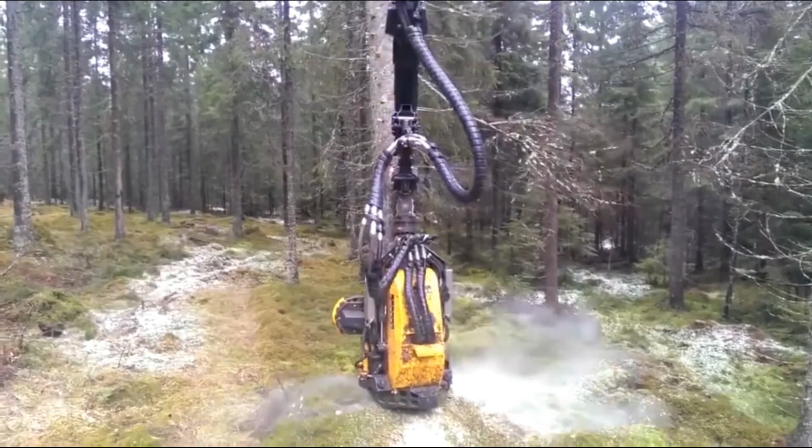This little device is affectionately known as the tree hugger. It's a marvel of engineering. In fact, it does in about 30 seconds what it used to take 50 men an hour to do. It's incredible. But imagine if we applied the same ingenuity to saving trees as we did to destroying them. Imagine if we applied the same ingenuity to healthy buildings as we did to toxic ones. In fact, this machine reminds me of one from our childhood. Do you remember this one? It's kind of eerie, actually, how close it is.

Okay, you get it. So the story I'm going to tell you today is about the XPRIZE and my recent work with them. The story is going to sound a little crazy, but I promise it's all true. It's really kind of a journey that I went on over the last year. Now, if you haven't heard of the XPRIZE Foundation, don't be surprised, a lot of people haven't, I've discovered, but you've heard of their work.

So they're a nonprofit, based in LA. Over 12 years ago, they launched an X Prize for space travel. The founder, Peter Diamandis, wanted to travel into space, but he wasn't an astronaut, and he realized nobody was working on this. So he launched a very simple prize: 10 million dollars to the first person that designs a spaceship that can carry three people 100 kilometers in the air, return them safely, and do it again two weeks later. Very simple, very clear, very elegant finish line.

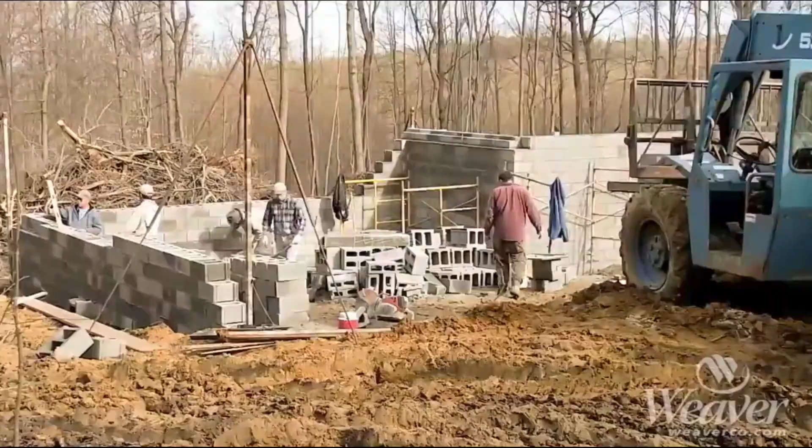The way we build our buildings is stupid. It's really dumb. It's a 200-year-old technology and involves a lot of resources and a lot of effort and a lot of labor. We mine natural resources out of the earth, and then we put them on fossil fuel-based ships and trucks, and then we schlep them all over the planet.

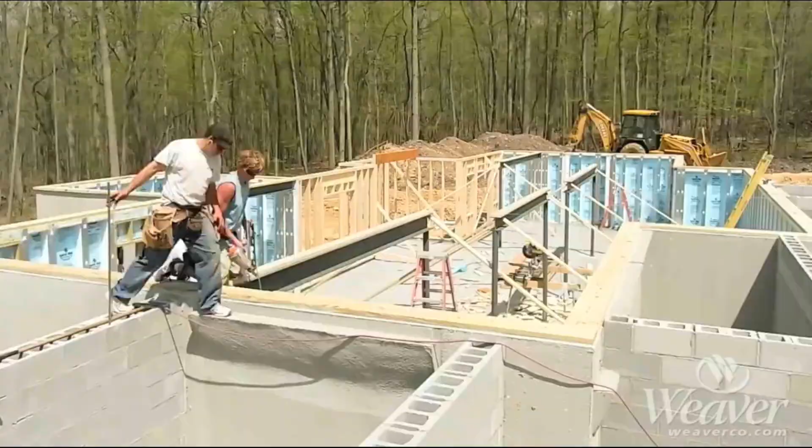And when they arrive on the site, they're not ready to go. They then need to be assembled piece by piece by piece. Every building is a bespoke prototype, essentially. Every building is a one-off. And we're not benefiting from the technologies of modular construction or GPS or CNC fabrication or robots or any of that stuff. We're still building the same way we built 200 years ago.

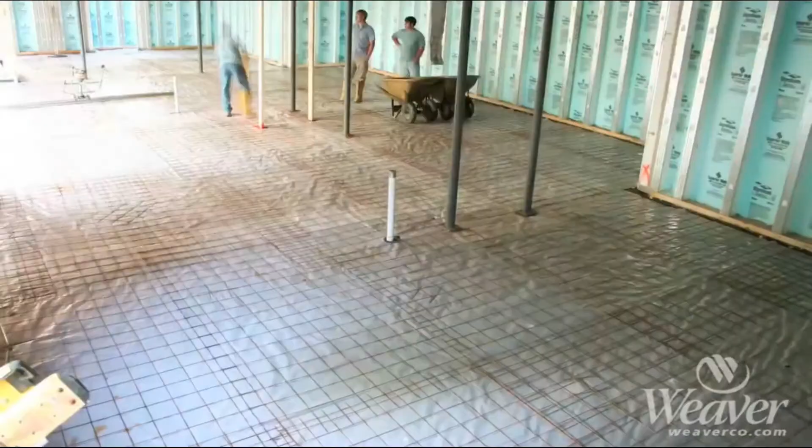And somewhere along the way, we managed to make the building somewhat waterproof, somewhat thermally efficient, but not really. They're not great. And that's the problem.

Within all of construction, there's this little tiny subset called green building. And honestly, that circle is way too big. I'm being too generous. Green building's nowhere near that big in relation to construction, but there's a potential exponential revolution that's about to occur, and it's going to pass us by if we don't tap into it.

A revolution involving biology, DNA, and health that could transform how we build our buildings and could transform radically the entire paradigm of how we construct anything. And so that's our big idea, essentially.

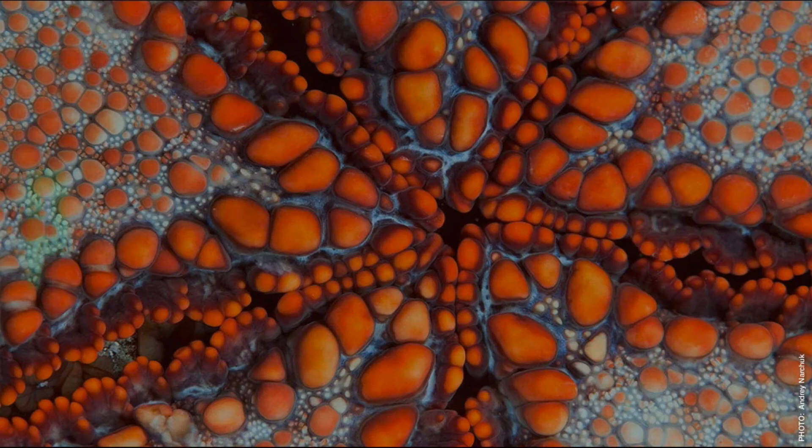And we call it, da-da-da-da, Wonder Woman, we call it prostruction. Prostruction is the opposite of construction. That's really it. It's designed to be positive. It's designed to be healthy. It's designed to essentially build the way nature builds.

So I'm going to show you our XPRIZE first, and then I'll explain how we got there. Generally, it's pretty simple. Grow us a wall, an 8-foot by 8-foot wall. Right? That's a good size. Have it match all the typical properties of a regular wall in terms of weight and strength and fire rating, but add in certain biological features. Maybe it glows, maybe it heals itself, maybe it absorbs CO2 or VOCs. Do this in 6 months and win $10 million. Again, very simple, very clear finish line.

Now, I should tell you a little bit about my background. I used to work for students of Frank Lloyd Wright. Mr. Wright called his architecture organic architecture. He even used biological terms to describe what he was looking at. He said that a building would grow from its site, that it would respond to its surroundings. And so for my entire life, my entire career, I've been waiting for this promise of true organic architecture.

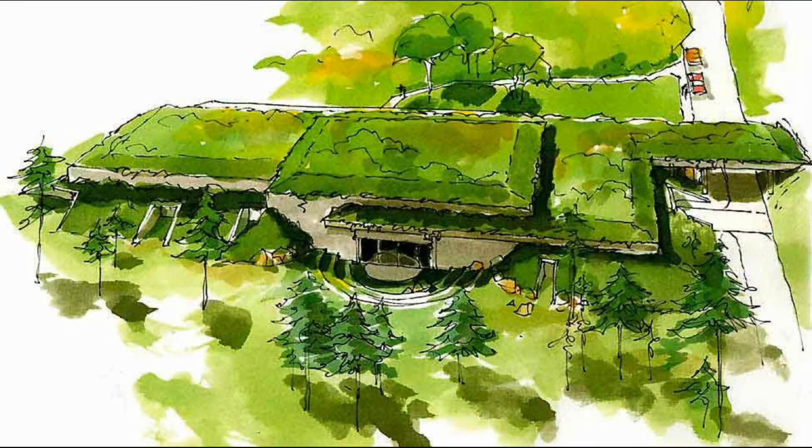One of my other mentors is Malcolm Wells. He was the father of underground building. Malcolm believed that we had a responsibility, a duty, that if we're going to build something, we're going to scrape the site to build a building, that we have to restore the nature that we've destroyed in the process. But most buildings don't do that.

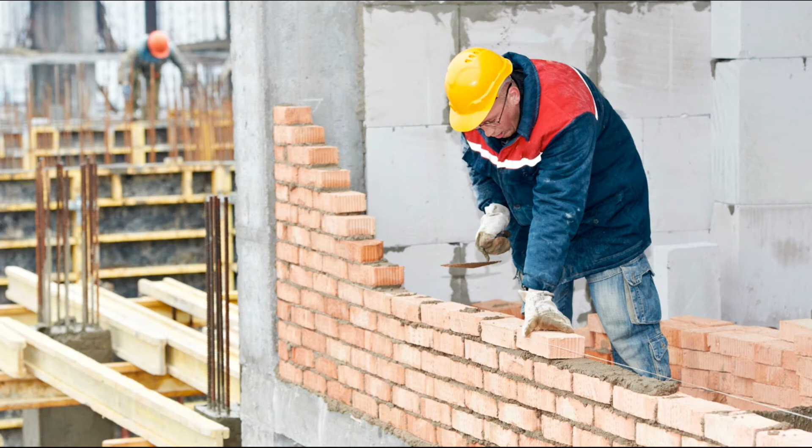Most buildings are put together essentially by hand, brick by brick. We've been building the same way for 200 years. And the way we build is just through brute force, just bam, bam, bam, right? We just hammer it all together and somehow it works. But these buildings are not very healthy and they're not very good outside, and they require a lot of maintenance and a lot of effort because we're essentially fighting entropy all the time.

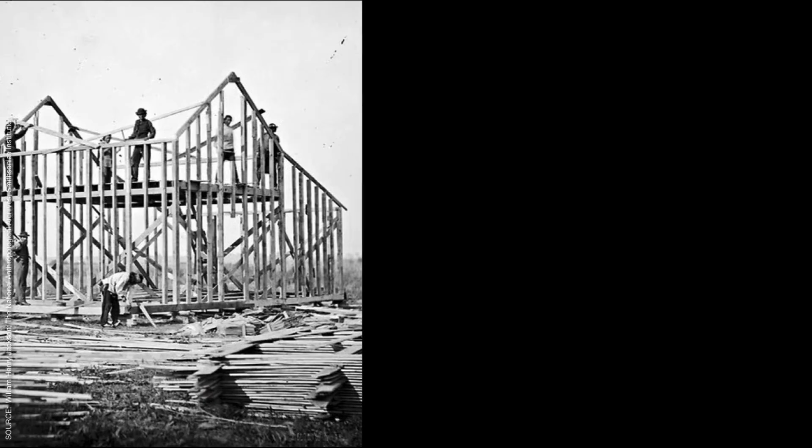In addition, we build the same way everywhere. We just crap out these buildings, and whether it's in Arizona or Alaska, it doesn't really matter. We build them the same way, and we've been doing this now for 2 centuries. And if you don't believe me, here, look. Here's a building from 100 years ago, and here's today.

They're exactly the same. It's the same technology. Really, I mean, the computers inside are nicer, but that doesn't affect the building. The base building is the same. I would show you one from 1817, but cameras hadn't been invented yet. Do you see how far behind this is? You could essentially resurrect a zombie from the Civil War, put him on a job site, and he'll go right to work. I mean, in a certain sense, that's convenient and helpful. But it really shows you how far we've strayed.

And we didn't know 200 years ago what we know today. We didn't know about indoor air quality. We didn't know about asthma, about cancer, about endocrine disruption, about any of those things that we now know. So none of that was really designed to address those issues. In fact, in most cases, it makes it worse. So it makes you think, as John Oliver would say, how is this still a thing? It doesn't make any sense.

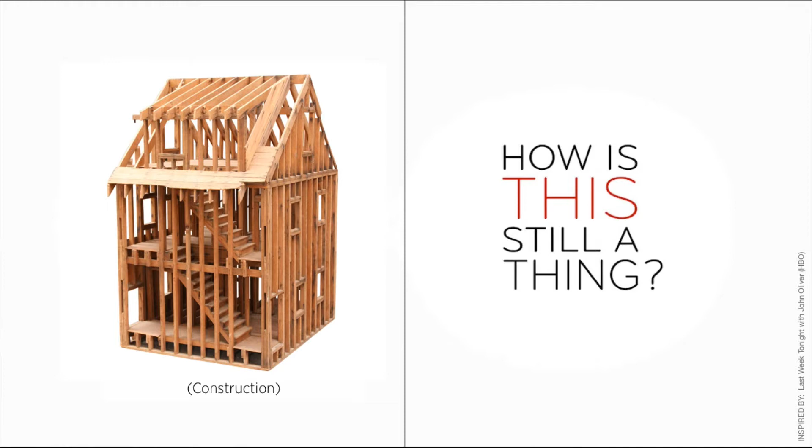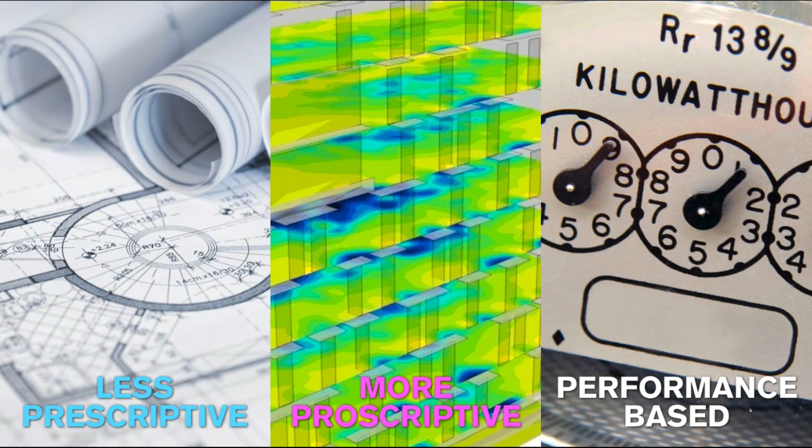We also know that building codes will continue to get less and less prescriptive, more and more proscriptive, and much more focused on performance-based. And that's already happening, right? In California, all new residential buildings have to be net zero by 2020. So this is just going to continue. And that's great, but I don't need to incentivize it.

It's already underway. All the while that this is going on, we also know that lobbyists are going to continue to drag their feet and block any meaningful regulation and stall things, especially things around climate change or healthy building regulation or chemicals. And we tend to only focus on finishes because they're there and they're out front and we can see them. And so there's lots of healthy finishes, lots of healthy furniture, but it doesn't change the underlying toxic problem that exists underneath.

Because imagine if the building was alive. Imagine what's possible. A building that breathes, that absorbs chemicals and CO2. A building that processes its own waste. A building that generates energy the same way that you do.

For years, I've thought about how would I mimic this in buildings? How would I do this in a mimicking type of way? And I did. I mean, I built thousands of buildings like this, buildings that I used to call healthy buildings. But this is not a healthy building. It's essentially my building won't kill you, right? So it's a benign building at best. Really, it's not. But knowing what I know now, I don't think I'd call it healthy. I avoided all known cancer causing chemicals, right? But still, it's not healthy.

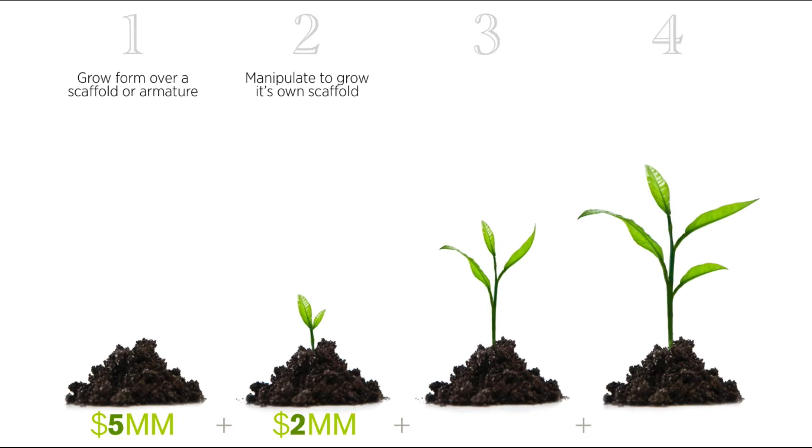We even mapped out the phases of how it could work. The first phase is if you were able to grow this wall over some sort of formwork, scaffold, or armature. Next, if it can grow its own scaffold at the same time—the same way your own body did, because you weren't born without a skeleton. Your skeleton and your muscles all formed together, so that'd be a next level up.

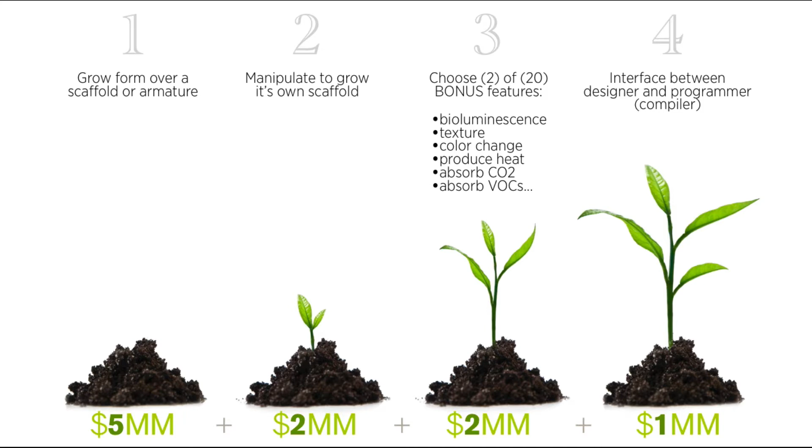And then if you can add in extra biological features, that's another level up. And then ultimately, if you create that interface between a DNA compiler and some sort of design program, then there's an extra bonus. We even defined the word grow—we had to. Essentially, untouched by human or mechanical hands or means.

And I know what you're thinking—you're probably thinking it's a plant-based thing, but it probably won't be. Nature has a wealth of technologies you could draw from, and plants, frankly, are too slow and not that strong. So we figure teams will do some sort of hybrid of two, three, or four of these different technologies. Maybe it's got a little plant in it, mixed with bacteria, mixed with some sort of crystalline or polymer-based thing, or some coral-based thing. Who knows? It's really up to the teams.

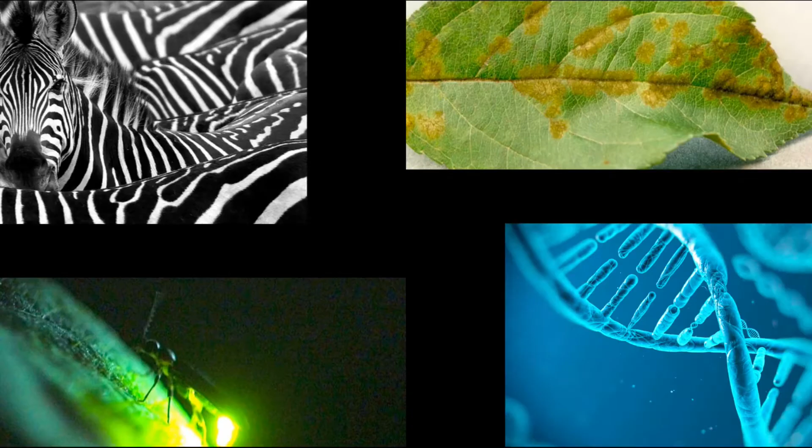Now, I know this sounds like science fiction, but it's actually possible—it's actually happening. For over 20 years now, there have been teams working on this, not for buildings, but generally manipulating biology to do what it wants. And in the last 3 years, this has become really prevalent, because for the first time ever, we know how a zebra gets its stripes, we know how plants heal, we know why a firefly glows. And it's all been possible through the cataloging of DNA.

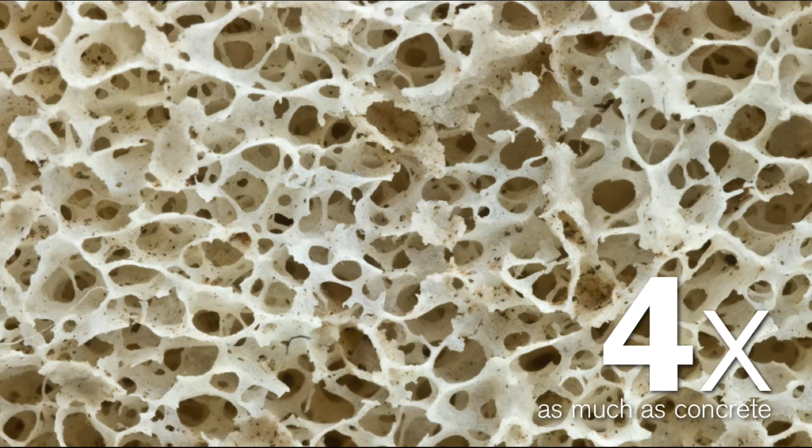Construction uses building blocks - we apply layers of structure, then skin, then fixtures, lighting, plumbing, and mechanical systems over time. In prostruction, everything grows together.

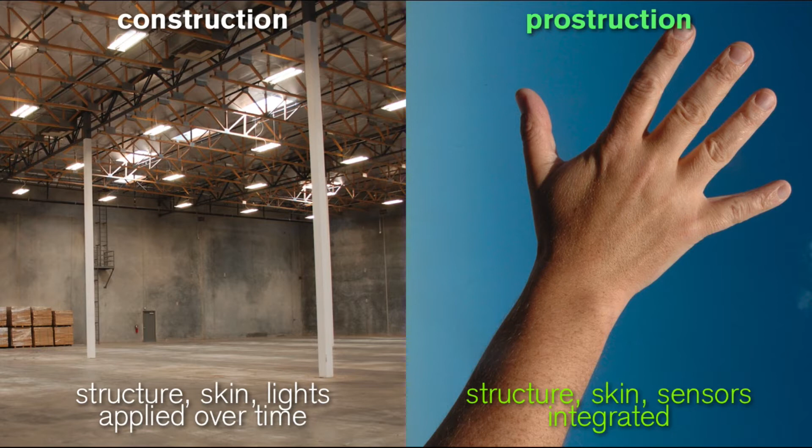You weren't born a skeleton, then had a building inspector check you out, then a team added muscles, then another inspector applied the skin. That's not how it works - it was all grown at the same time.

So we're switching from construction being mass production into prostruction's mass customization. Every building could be unique because it would respond and adapt to its surrounding and its site.

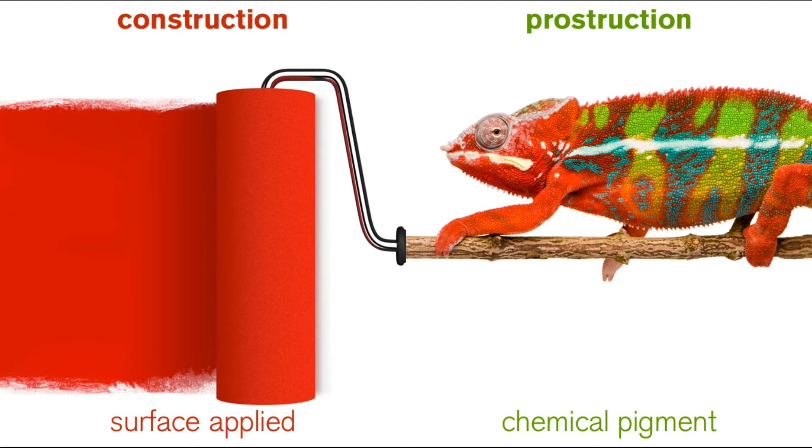We wouldn't need to paint anymore applied to the surface - pigment could come from within. And you wouldn't even need lights anymore, because the whole wall could glow if you wanted to.

Imagine every building could be a LEED Platinum building or a Living Building Challenge building. It'd be baked into the DNA of it.

Every surface could be a sensor or a smoke detector because it would just secrete the chemical when it came in contact with it. And the walls themselves could heal - you remove a picture hook and it heals up the same way your skin does.

You could even change the color based on your mood or the time of year. It's October, so for Halloween we'll make the walls orange, right?

You wouldn't even need street lights anymore because the trees could essentially light your way home. Every surface could absorb VOCs or CO2 or anything you want it to, really.

And this is very much designed to work with existing buildings. You would mix and match construction and prostruction all the time.

We even anticipate that people would talk about it - so you'd grow your shell with prostruction and then you'd still put in your IKEA cabinets or whatever furniture you want. You'd have to. I did a kitchen for a client once, and we spent $350,000 just on the kitchen.

It was gorgeous. Well, 10 years later, they ripped it out and did a new one. That's what people do. So let's grow our shell out of prostruction, and then you can build your regular things you're going to rip out with construction.

This very much could grow over the old buildings and restore them and expand them at the same time. So the old buildings could become like a formwork or a skeleton for the new stuff.

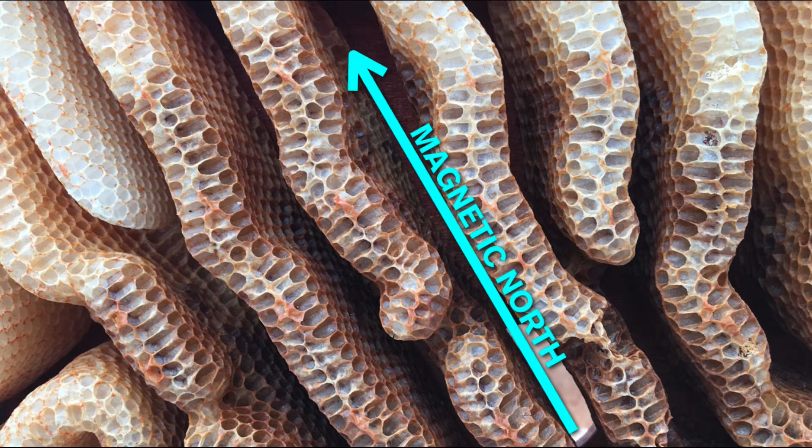We could even bake the building code itself into the DNA. So if you were to grow a stair, the steps would automatically be 7-inch risers. You wouldn't need building inspectors anymore.

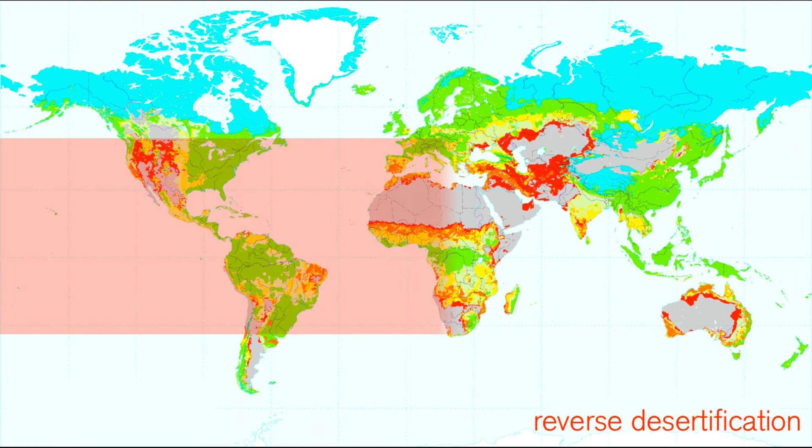And nobody's going to miss them, trust me. Any mistakes that you make don't become waste, they become compost to feed the next batch that you then grow. So this could very much reverse desertification in that narrow band on the planet where most of us live.

This thing is really designed to grow and evolve over time. Imagine every surface a battery, a sensor, a transmitter, an insulator. It's all possible.

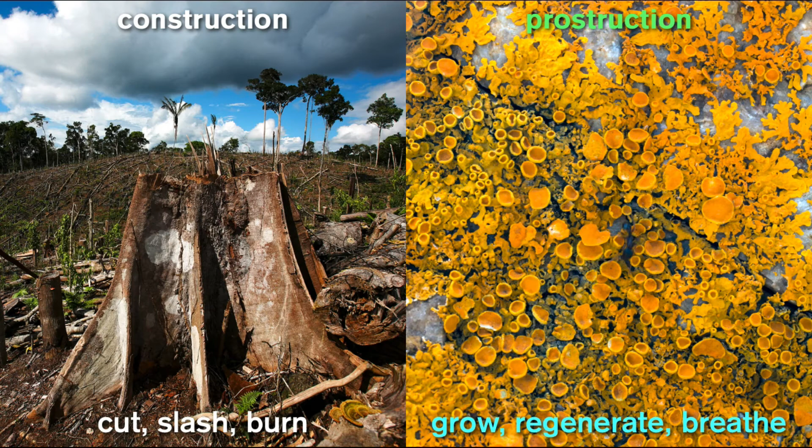So let's grow our buildings. Let's change this paradigm from one of cut, slash, and burn to grow, regenerate, and breathe.

This is not a new idea. This has been around for a long time, as I said. It's a field that's been not talking about construction, but talking about manipulating DNA to do our bidding. It's part of a larger set of trends that are exploding exponentially.

For years, we've had low emitting materials. That's already passe. Then we went into zero emitting materials - zero VOC paints, zero formaldehyde added plywood, and so forth. Now we're really seeing an explosion in agricultural waste-based products - straw board, wheat board, sorghum.

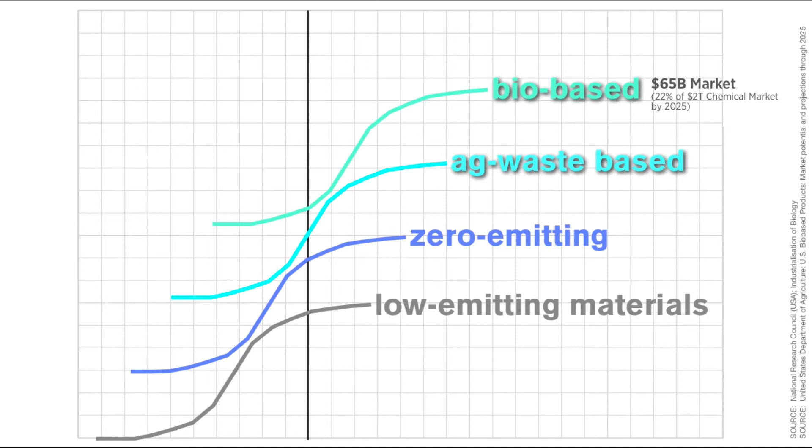DARPA, the research arm of the U.S. military, the guys that invented the internet, they have a biological technologies office already in place. Last year they put out an RFP for what they called engineered living materials. You can apply for it.

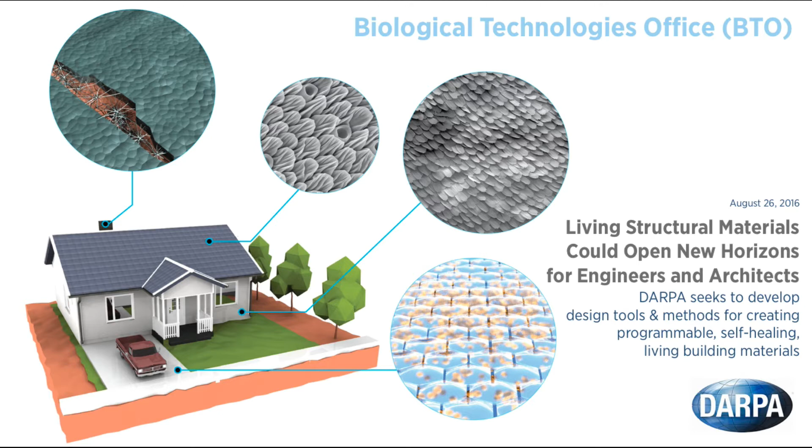So this is part of a larger movement, a larger trend that weaves together all of these disparate ideas that are working in silos and puts them into one big picture. It mixes cellular engineering and biology and DNA with everything we've learned about biomimicry, cradle to cradle, living buildings, and healthy materials.

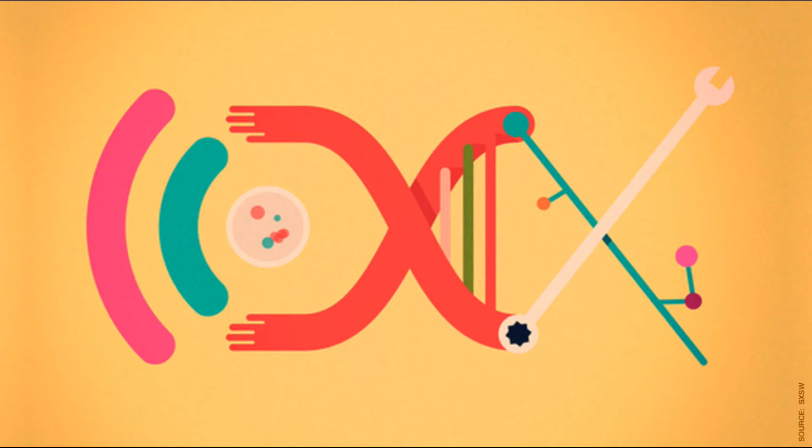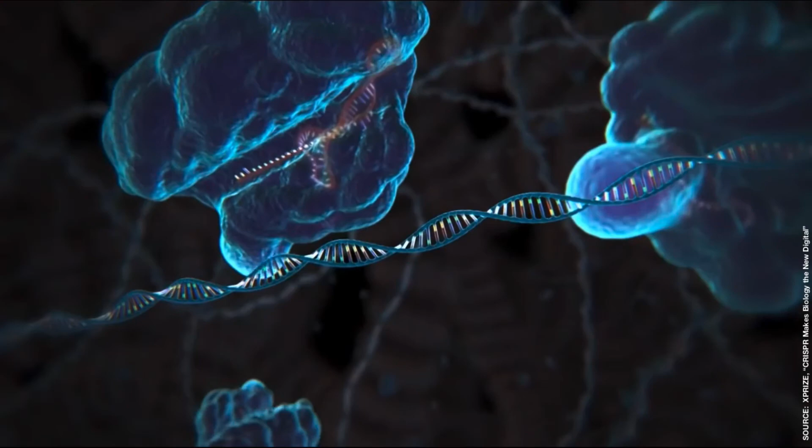For the first time in human history, human beings can now cheaply and easily catalog, edit, replace, and replicate DNA, and the cost of which just keeps going down. And it's all made possible by a technology called CRISPR. CRISPR is a molecular scalpel that we can program to cut any DNA sequence of interest.

CRISPR is one of the tools that is making biology become the new digital. Biology is the new digital. You hear that? So biologists are now able to mix and match and swap DNA code the same way that we swap MP3 files. And by the way, if you're wondering what CRISPR stands for, it's the world's worst acronym. Don't try to remember it, it'll just give you a headache.

But it's part of a larger field called synthetic biology. And every major university now has synthetic biology departments. So we looked up the hottest synthetic biologists in the world, and I contacted most of them. And these were three of my favorites, and they were really helpful with the project.

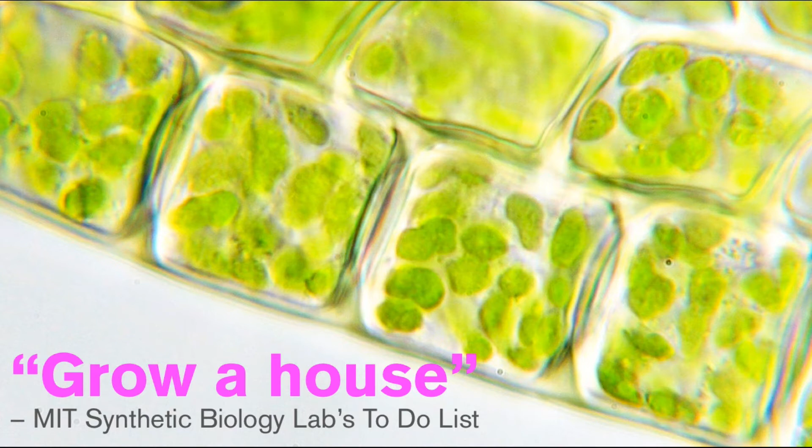Drew Endy from Stanford, and then Ron Weiss and Christopher Voigt both from MIT. And so I met with them all. And if you look at MIT's synthetic biology site, growing a house is on their to-do list. These three guys have been talking about this for about 20 years, but didn't really know how to do it.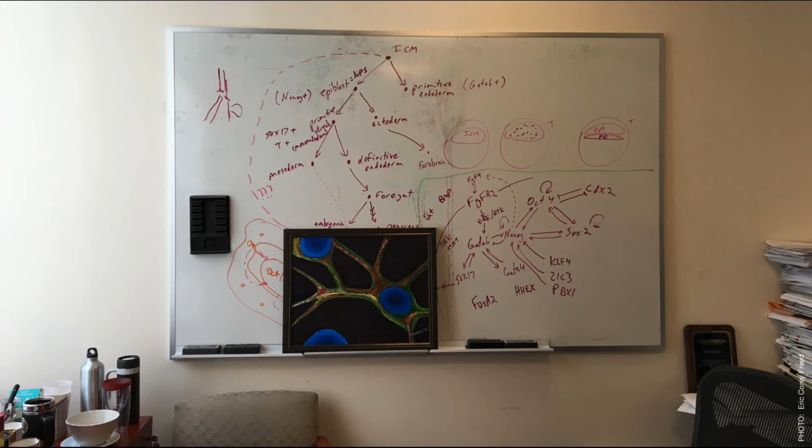That's his lunch order. Do you see what I'm saying? He's just a brilliant guy. He's at a whole other level than you and me. And we started talking about this idea of growing buildings.

And every time I said something to him, he would say, oh, that's easy. So what if I wanted a surface to be a smoke alarm? Easy. What if I wanted it to absorb VOCs or certain chemicals? Oh, yeah, easy. What if I wanted it to glow or heal? Easy. In fact, I started to get very uneasy about his use of the word easy, because it's not a very scientific word. And I said, well, what do you mean by easy?

And he said, we've already identified all the DNA that does those things in nature. So we could literally just drag and drop those as packages, just like we do with software. I said, okay, well, if all that's easy, what's hard? And he said, well, that's the problem.

Buildings are big. We can't grow anything that big. We don't know how to yet. And then he took out his phone, and he flips to a few pictures, and he says, see this? Yesterday I grew a liver. I said, what? He said, yeah, it was pretty cool.

I took some skin cells from the back of my hand. I programmed those to be stem cells, which is easy, by the way. And then we commanded those to become a liver. And I said, are you telling me you cloned your friggin' liver yesterday? Is that what you're saying?

And he's like, oh, no, no, no, no. This isn't a clone. This is actually a better liver. My liver sucks compared to this liver. This is a whole— I said, what is it? Play chess or something? What do you mean it's a better liver?

He said, well, this liver can tell us and alert us when it encounters disease, like cirrhosis. And I said, what does it send you, like a text message or something? Like, I'm an idiot, what do I know? And he said, no, no, when it encounters some sort of disease, it releases a chemical and changes color, so it alerts us. And I said, well, what do you need me for then?

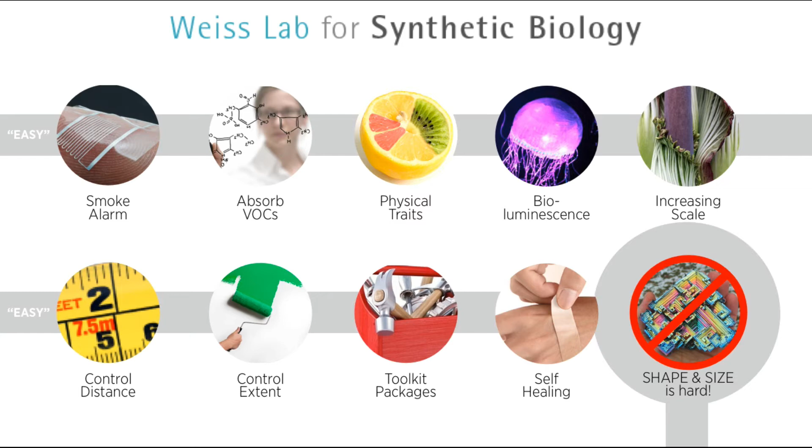An apple, for instance, is mostly scaffold made of fiber with apple DNA in it. You are a scaffold, right? You're a skeleton draped in muscles and tissues and organs.

And this is the problem. The scaffolds that the biologists use now are small. They're medical grade, they're sterile, they're expensive. What this XPRIZE really is, is a prize about growing a cheap, deployable, large scaffold so we can grow things bigger and more quickly.

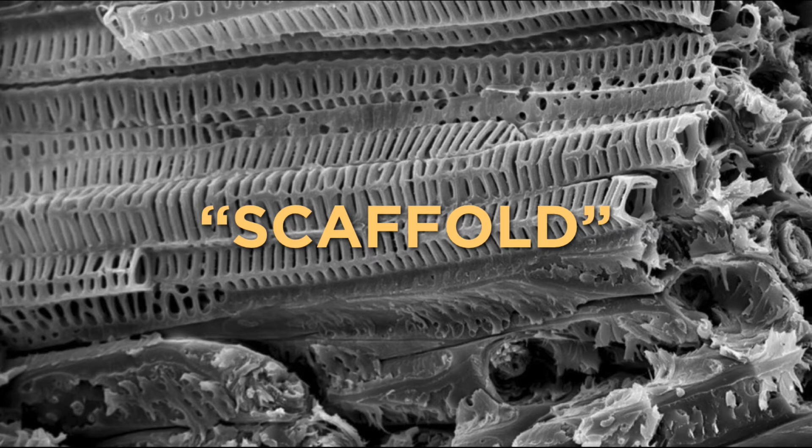Now, when I think of scaffold, I think of this, probably the same way you do - a kind of rigid frame that something grows on. Well, that's basically it, and nature has thousands of variations on how it builds a scaffold. So that's what this XPRIZE really is.

Build us a cheap, deployable scaffold. And in buildings, it doesn't need to be medical grade, it doesn't need to be sterile. It could be old apple cores if that really works, as long as it gets the job done.

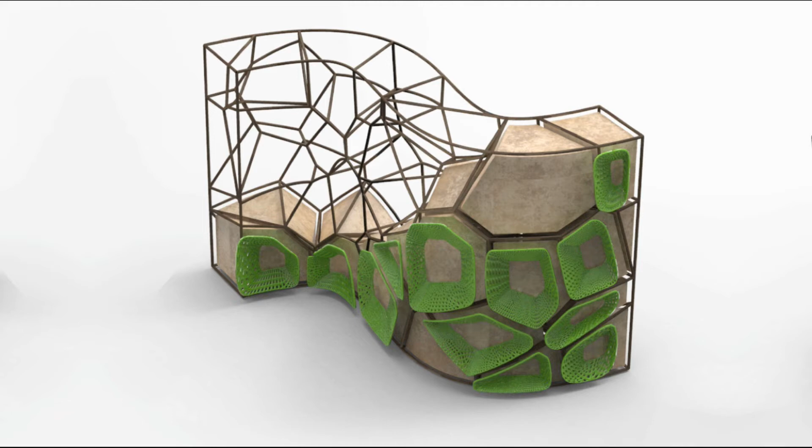So as I was talking to Professor Weiss, I said, how do we make sure that we don't get another, I don't know, Jurassic Park? How do we prevent that from happening? And he just laughed and said, well, first of all, your building's not going to try to eat you, and it's certainly not going to chase you around a kitchen. And if it did try to eat you, it would do it really, really slowly. I said, is that biology humor? And he said, yeah. So there you go. So if you're sitting there worrying that we're going to invent the next Swamp Thing or whatever, apparently it's not going to happen. It's not a problem.

Now the construction industry is desperate for disruption because it's not very sustainable. We have beautiful old buildings that we destroy and replace with buildings that are not as nice. So this is our chance to fix some of those economic failures of the past, update them and restore them. It's our chance to look at old infrastructure that's horribly inefficient, question it, and find a new way to do it.

It's our chance to look at models like this where we've paved over paradise and put up parking lots, and restore this back to something more useful - something that produces oxygen or energy or something else. Besides, what are we holding on to here? We're not very good at this whole building thing.

I know architects get romanticized, but the truth is we're not very well liked. In fact, they even made a commercial about it.

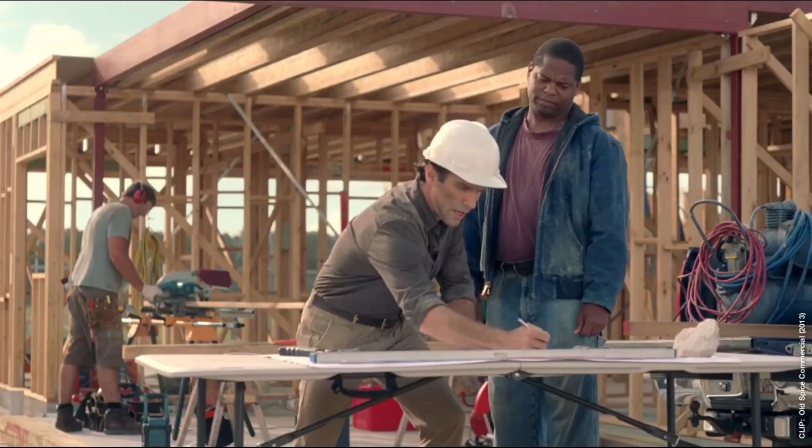You're working hard, you know that it's true. You need a brand new soap that works hard too. You are the worst architect in the world.

The title at the end is my favorite part.

Now, if you don't believe that we're not very well liked, just Google it. These are not fake, you'll see what I mean. Nobody likes architects and contractors. Everybody I meet all over the country has horror stories about their architect or their contractor - how they felt they got screwed or ripped off or not listened to. So we're not very popular. What are we holding on to here?

By the way, you can learn a lot from Googling things. Like, I didn't know that you could accidentally, quote, 'kill your sister.' I didn't know that was a thing.

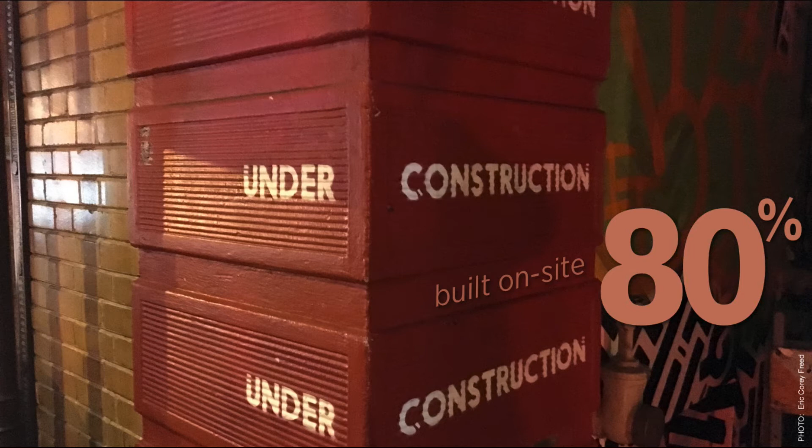Anyway, so our buildings are surrounded by failures. Every aspect of them is a failure. First of all, we build most of it on site, outside. It's very hard to build things outside. Do you realize that? Go buy a model airplane and build it outside, and you'll see what I mean.

We build it outside in the rain. And by the way, job sites are incredibly dangerous - one of the most dangerous professions there is. I was on a job site once and I stepped on a nail, and it not only went through my shoe into my foot, but then popped out the top on the other side. And that'll ruin your day, let me tell you.

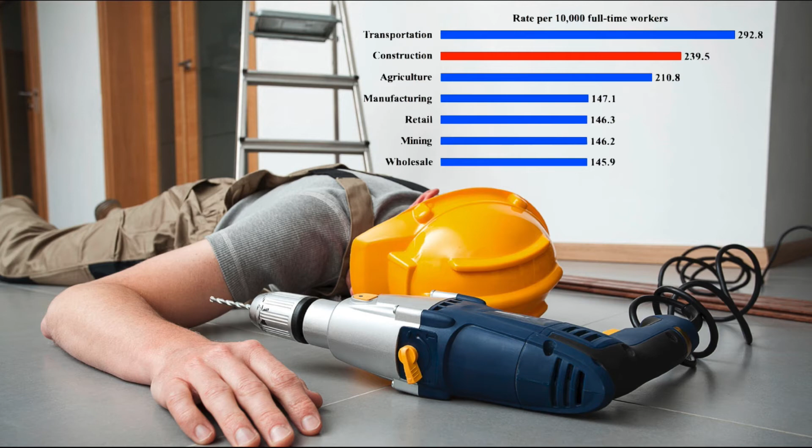And then buildings are routinely over budget and over schedule. It's become commonplace, really. In fact, we have whole meetings just to make sure how bad is it going to be.

Worker productivity has gone up in every other industry, but it's gone down in construction because we're building the same way we built 200 years ago. There's no technology here that's helping us along. So productivity is going down, labor costs keep going up, and our profit margins keep shrinking.

It's a terrible business model that keeps getting worse. Because of that, we have no time to research sustainability or green building methods. We kind of fit it in when we can, usually in our free time or evenings. All of these materials are mostly made elsewhere, far away, without any standard about health or anything else. Their costs keep climbing, and now they're externalized, so they're out of our control. We don't really have any say in it.

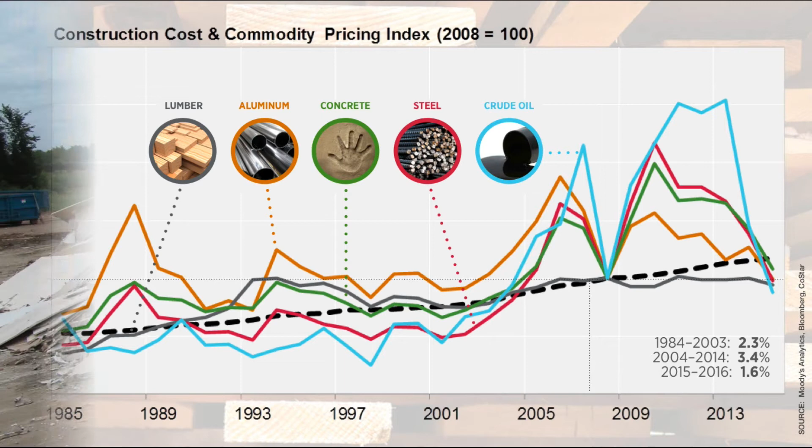On top of that, we're the only industry with a 37% waste factor. For every building we build, we have about a third of a building left over that we put in a landfill. That's not sustainable. Could you imagine if every time Apple made an iPhone, there was a third of an iPhone they threw away? They wouldn't be in business very long.

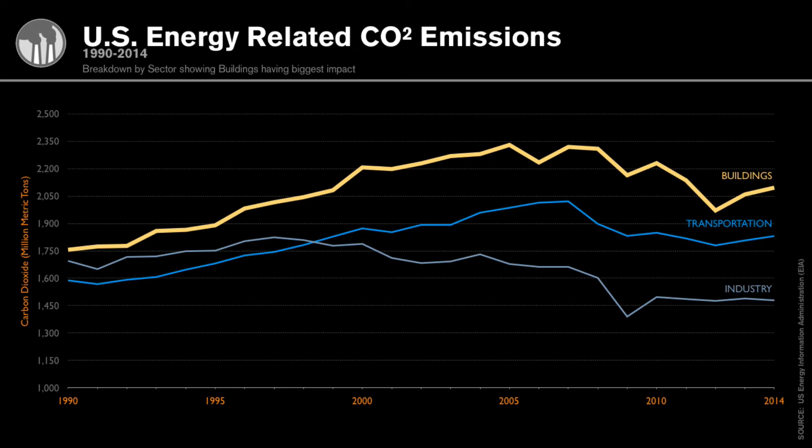And yet buildings are what need to change, because half of our carbon emissions are coming from our buildings. So pick your market failure, whether it's labor, waste, climate, or materials. We're surrounded by these failures. On top of that, our buildings are not very comfortable.

We're built in these beautiful, sensual curves. Some of you more than others, but still, we're built in these gorgeous curves. And buildings are not. They're flat and angular and bumpy, and you hit your elbow on them all the time, and they hurt. So we need to change this.

On top of that, they're killing us. What I'm talking about here is indoor air quality. And when you think of indoor air quality, you might be thinking of Dwayne in the cubicle next to you sneezing all the time. I'm not talking about him.

What I'm talking about is when a baby crawls across a carpet, it's absorbing known phthalates, known endocrine disruptors, through its little pudgy hands and pudgy legs. I'm talking about that new car smell every time we paint a room, more cancer-causing chemicals. I'm talking about the fact that indoor air is 10 times more polluted than the outside air, which isn't very good either, by the way.

Or the fact that all of you have on average about 17,000 known catalogable cancer-causing chemicals in your home right now. That's the trouble. And if you look at the sources for poor indoor air quality, 9 out of 11 of them come from buildings.

Because you can choose not to smoke and you can choose not to have a cat. And by the way, you should totally choose not to have a cat. They're weird, they stare at you, they're finicky. Don't have a cat is really my point here I'm trying to make.

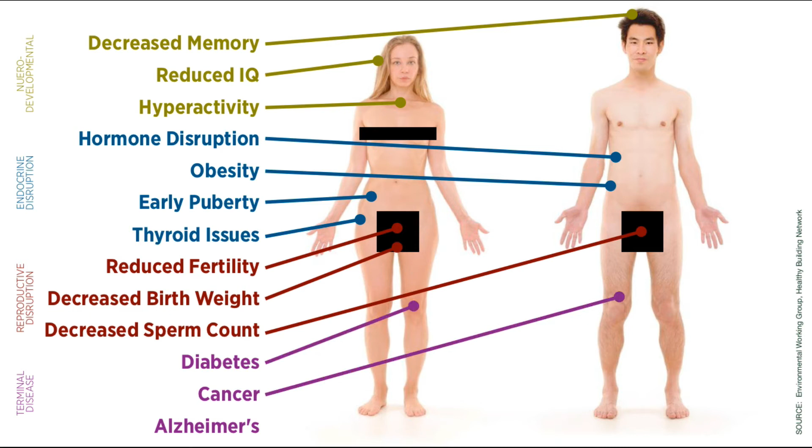So we can control most of these with buildings. We need healthy buildings now more than ever, especially now that over the last 30 years, we've realized how they're linked to a range of diseases—everything from neurological to terminal, everything from headaches to cancer, essentially.

And these toxins keep building up through what's called bioaccumulation. As we're having children, we're passing on our toxins to them. The average breast milk contains 500 known catalogable cancer-causing chemicals in it. The average umbilical cord blood has 300. And we still don't know how all of these different chemicals will interact with each other.

But buildings do not prepare us for this. Now, when you go to a restaurant, there's a social contract, right? You can essentially be assured that the waiter's hands are clean, that the dishes are clean, the silverware is clean, that the food, everything on the plate, is edible, including the garnish. But there is no contract like that with buildings.

So I would argue that also environmentalism has failed. 40 years of modern environmentalism has brought us to the exact place we were trying to avoid in the first place. Now, I'm an environmentalist, and I have friends that are environmentalists, and I'd be the first to tell you, we're annoying.

But what's going to change this? There's virtually no research and development in the building industry, right? Less than 1%. Compare that with the type of R&D they do in the aerospace or automotive industries, and you'll see what I'm talking about.

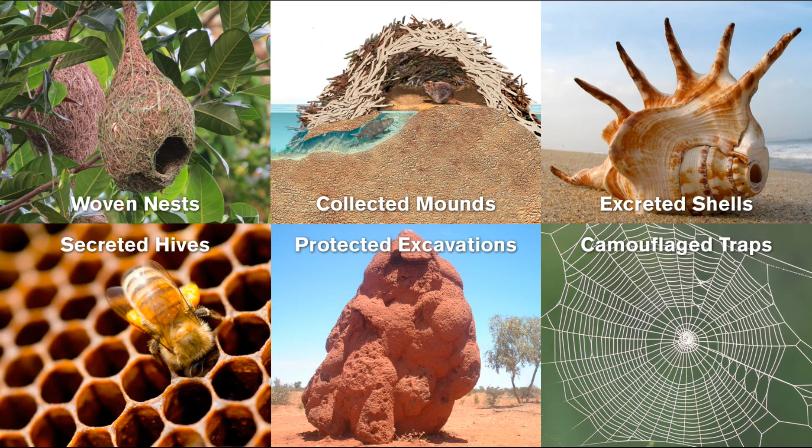This is the paper wasp. It builds its nest in a matter of days. It takes wood pulp from local trees, mixes it with saliva, and makes a form of cement. It can even change the hydrology of the cement based on the humidity in the air.

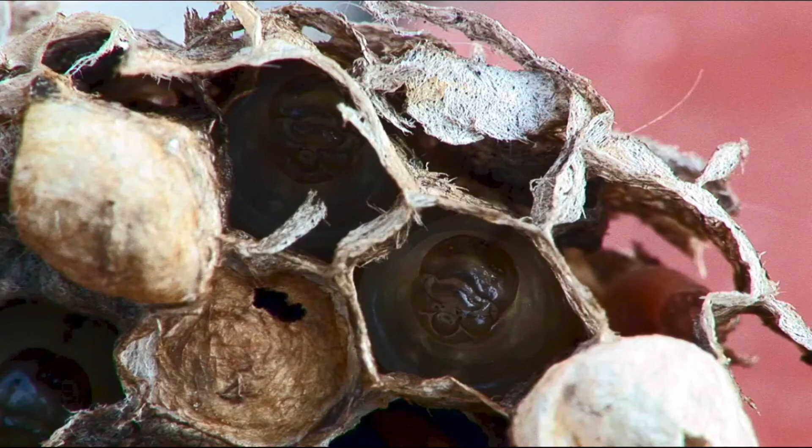It's amazing. This is the weaver bird. It builds its nest in a matter of hours. It takes local grasses from around the site and uses its own body as a tape measure. It builds it on this cool tripod shape and makes the opening just big enough so the weaver bird can get in, but none of its predators.

It's incredible. These are termite mounds. These little critters build these things 14, 20 feet high. They excavate little holes around the edges so as wind passes over the mound, it pulls the air out through passive ventilation, a form of air conditioning.

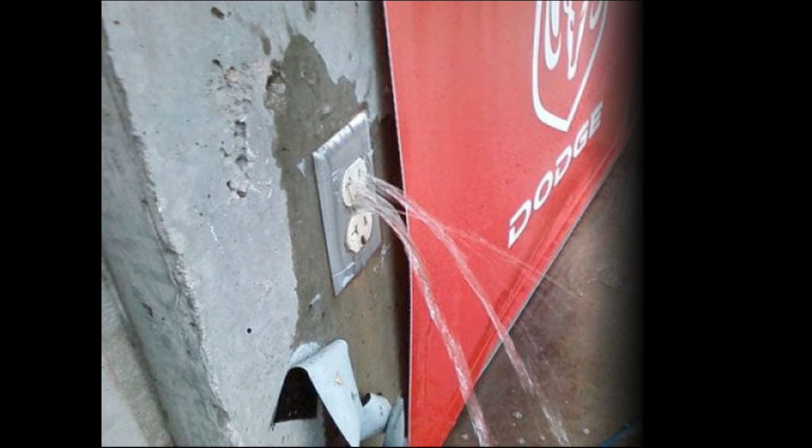What are you holding onto here? We're terrible at this. Sometimes it's just comedic and sometimes it's disastrous, but we're not very good at building these buildings, even though we think we are. We make huge mistakes all the time.

Nature's not perfect either. Nature makes mistakes. Nature's builders make mistakes. Nature itself makes mistakes, sometimes weird, freaky mistakes. And that's fine. So what if we combined the best of both worlds? What if we took mankind's cleverness and ingenuity and mixed that with nature's technology? It's not a bad idea.

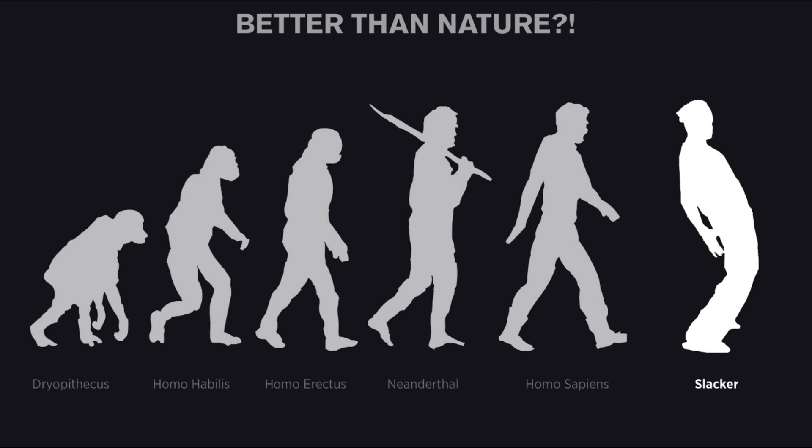So imagine if we took that ingenuity combined with nature's technology. That would really be something.

We even had a design competition with our friends at Inhabitat and some all-star judges, and we asked people to show us what Prostruction could look like. We received hundreds of entries from 14 countries. It was kind of amazing. Some of them are totally fantastic and incredible, and some look like pretty traditional looking buildings, but grown on the site. It was an incredible experience.

We had these displayed in the space that we created, and you can see the rest of them online. These are just a few of my favorites.

So that's it. That's the power of using nature as a technology. That's the power of putting nature in your mindset to create a paradigm shift. Think about that, because that's what nature really is. Nature is a technology, 3.8 billion years of research and development. You've heard of better living through chemistry—this is better living through biology, essentially.

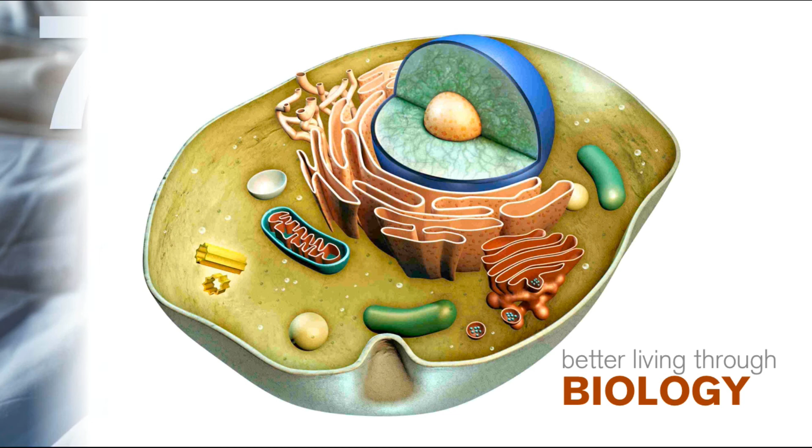This could radically transform everything and even save the 7 million people a year who die due to toxin exposure they get just from inside their homes. So let's grow our buildings. Let's embrace this idea of prostruction. Let's grow healthy buildings for everyone, everywhere.

Cheap, abundant, healthy buildings. Or as President Trump likes to say, we need to build a wall, and it has to be built quickly. Quickly, hear that? Quickly. So let's do it quickly. Let's go, let's do it. Grow us a wall. Have it match the properties of a regular wall. Add in some biological features. Do this in 6 months. Win $10 million. Doesn't that sound good?

Doesn't that sound exciting? If we launch this prize, we're building a future of beautiful, abundant, healthy buildings for everybody that could radically transform our health and our relationship to nature. That is the pot of gold at the end of the rainbow. That's the definition of victory, not just for Americans, but for everybody, for the 21st century.